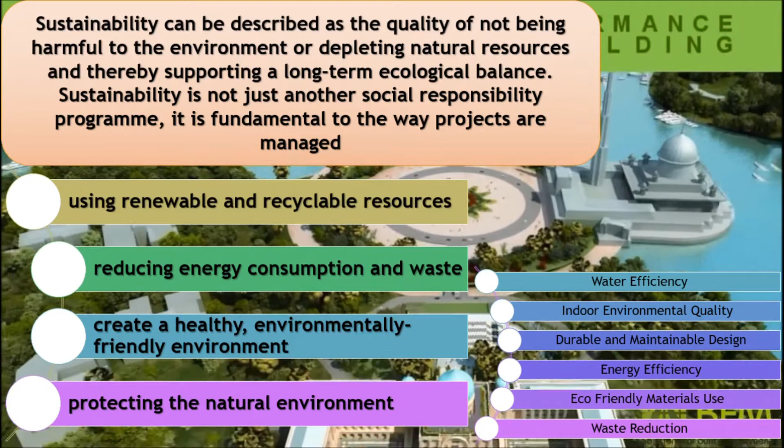Examples of sustainability include using renewable and recyclable resources, reducing energy consumption and waste, creating a healthy, environmentally friendly environment, and protecting the natural environment. The application in the construction industry is through water efficiency, indoor environmental quality, durable and maintainable design, energy efficiency, eco-friendly materials use, and waste reduction.

Ishikawa diagram. An Ishikawa diagram is a diagram that shows the causes of an event and is often used in manufacturing and product development to outline the different steps in the process, demonstrate where quality control issues might arise, and determine which resources are required at specific times. In this report, we are using an Ishikawa diagram for the project management to achieve sustainability in development.

Construction workers: lack of training in new technology, affecting motivation and productivity of workers. For the developer: increasing overall project cost, and mode of funding of the project.

For the contractor: higher cost for construction materials, lack of environment management during the construction process, poor communication during projects, lack of knowledge in sustainability, and lack of competencies in construction managers.

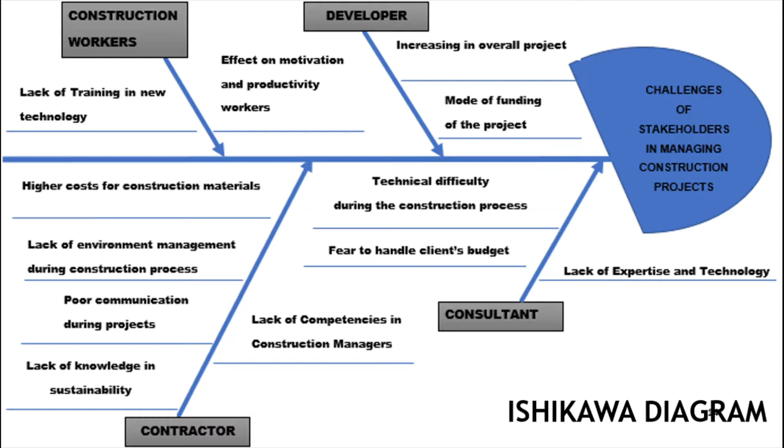For the consultant, there are technical difficulties during the construction process, fear to handle clients' budget, and lack of expertise and technology.

Impact towards developer, which are increasing overall project cost and mode of funding of the project. In a market survey, it is identified that among construction practitioners, there is a belief that sustainable construction practices will raise the cost of construction projects without a quantifying benefit, which is a perception that poses an important challenge.

Another aspect related to economics, apart from cost, is construction time, which is considered a critical performance criterion of construction projects. Construction delays will often increase the cost of the project and affect the reputation of all stakeholders, since sustainable construction requires the integration of green technologies with other building components. Therefore, dramatic delays will result if this is not considered throughout all project stages.

Mode of funding of the project, which is finance-related factors. The factors loading on this component are budget constraint, which is fear of increase in cost, and mode of funding of the project. These factors are finance-related, hence the component is named the finance-related factors.

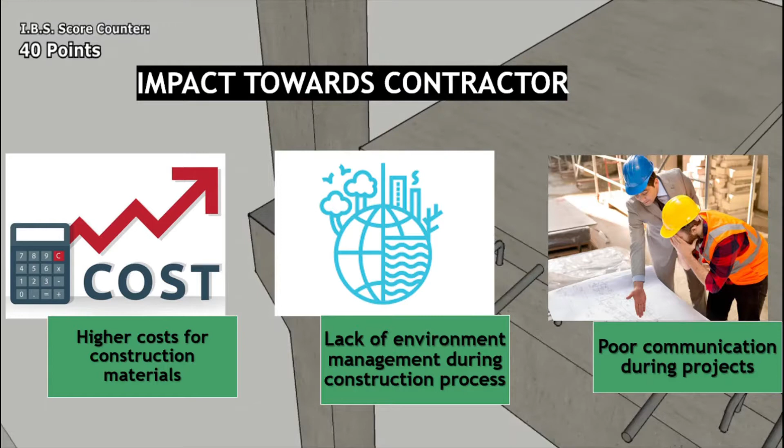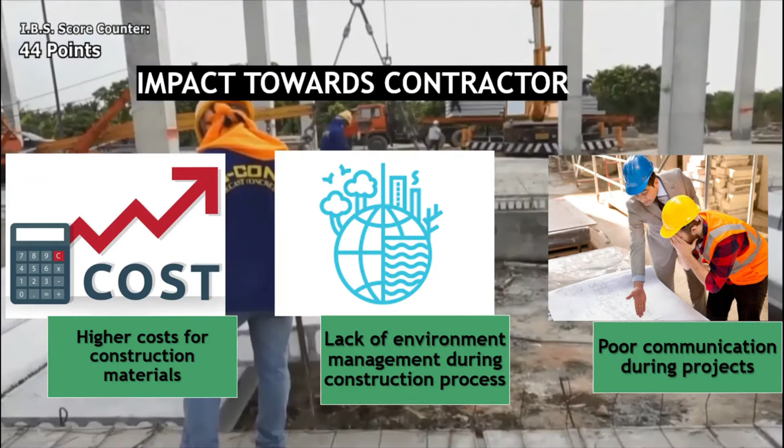The higher cost of green construction directly affects the project manager because they are responsible for managing and delivering their projects within an allocated budget.

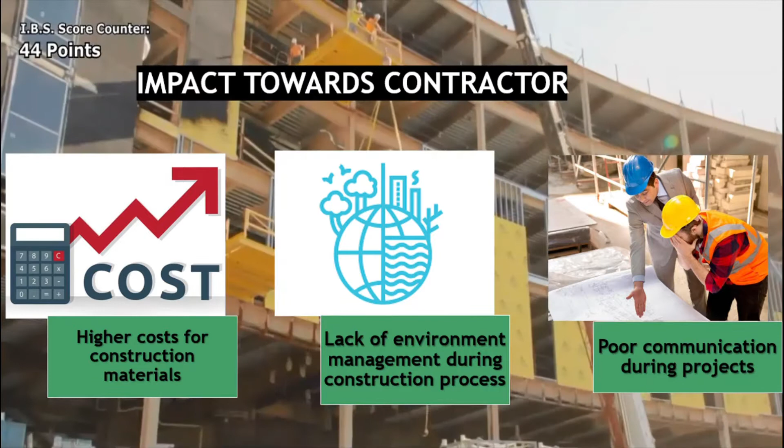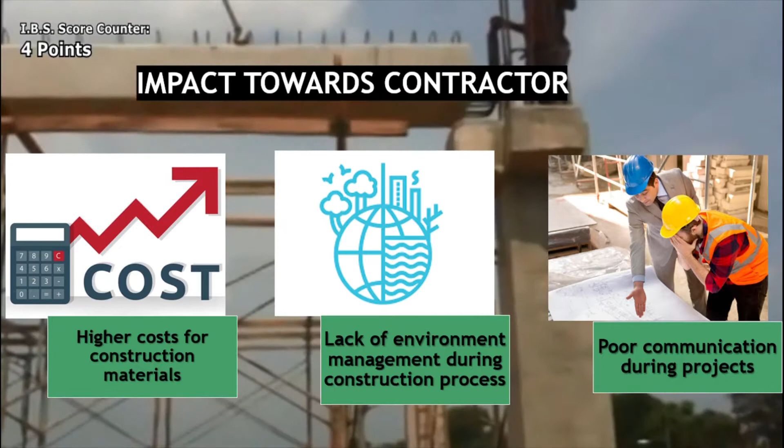The second impact is lack of environment management during the construction process. The main areas of concern were appropriate site planning and organization, assessing traffic movement, prevention or minimization of discharge, gases and airborne discharge to the atmosphere, chemical emission, noise and vibration, management of hazardous substances, waste management, and health and safety.

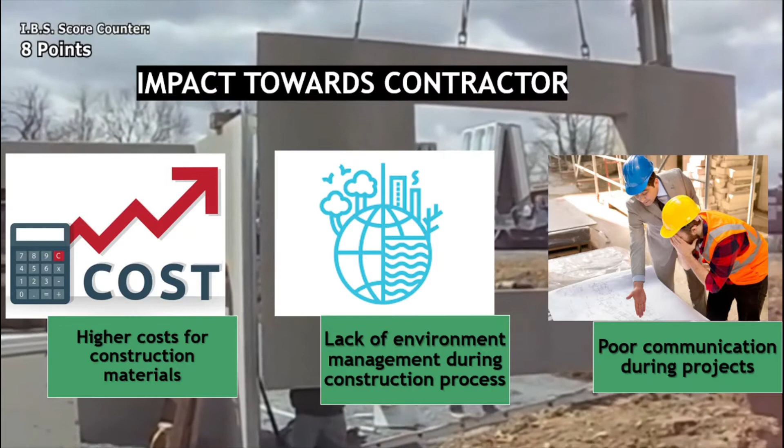The main contractor had no formal environmental management structure within its organization, but had large experience in health and safety management.

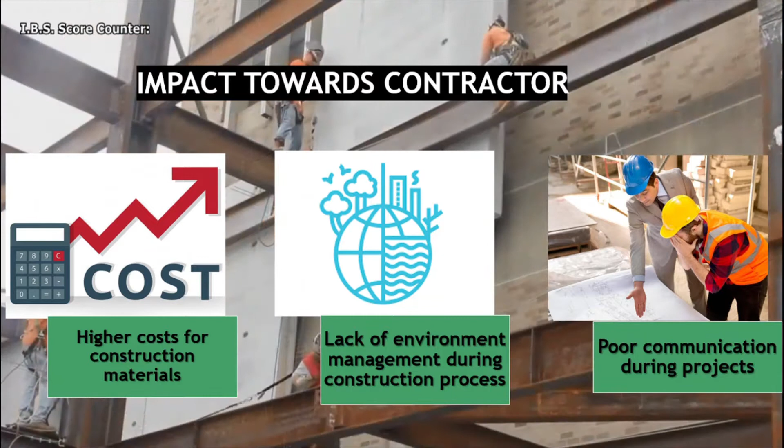The last impact is communication. Taking into consideration that a variety of stakeholders and parties involved come with similar or different requirements for the project, they participate throughout the processes, where it is clear that effective communication planning is essential in order to be sustainable.

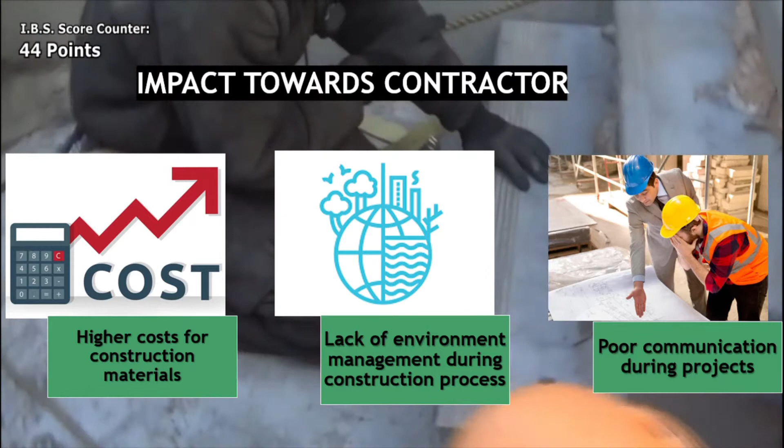The ways to promote communication can be seen through the following: first, reports are able to reach members in time; and second, to schedule times when members gather and communicate.

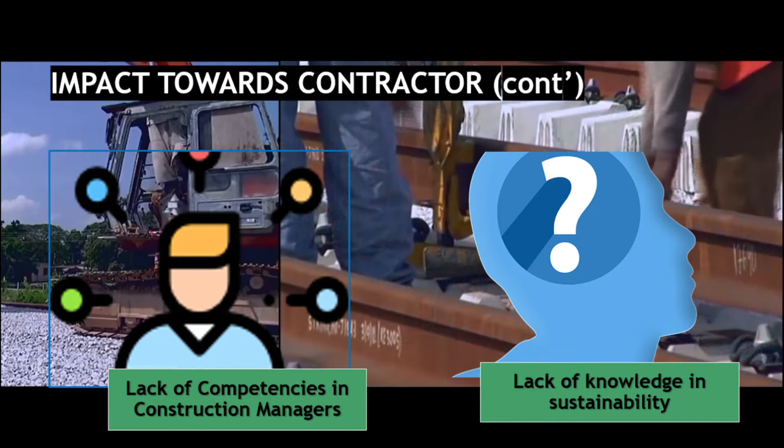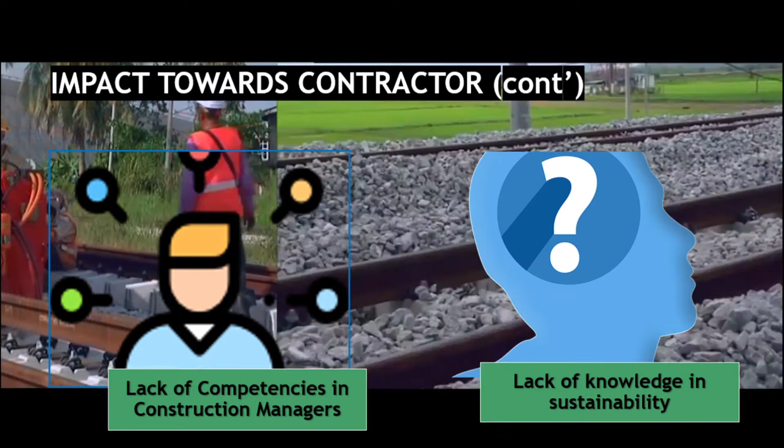Next, the impact towards contractor is lack of competencies in construction managers. Positive shifting in leadership qualities and top management's competencies has a big impact on sustainable construction success. In order to achieve the benefits of sustainable projects, it needs encouragement from highly committed leadership. The leaders are crucial to have a deep understanding of the barriers in sustainable construction. Construction firms need to finalize the leadership which is able to provide the strategy, direction and vision towards a sustainable future. Leadership has a significant role in encouraging sustainable construction.

The next impact towards contractor is lack of knowledge in sustainability. The objective of sustainable construction can be obtained if practices are informed by knowledge. This can be simplified through an example, which could help firms change their traditional construction culture: first, identify the objective and study the suitable implementation; next, create proper guidelines and brief the workers when and how to implement; next, highlight the benefits with all parties involved; and lastly, review the implementation.

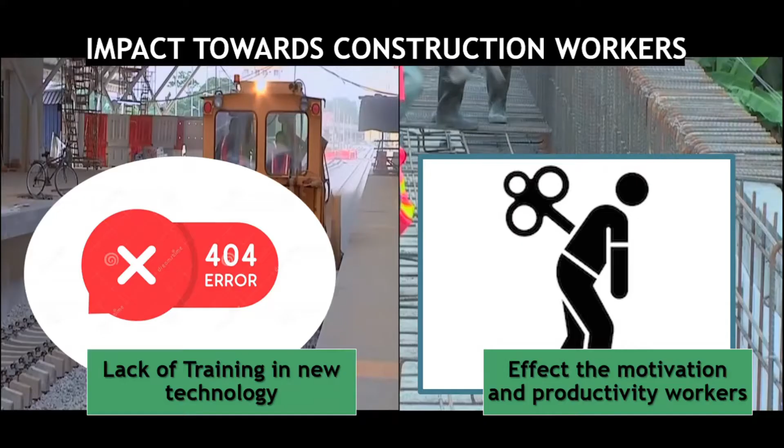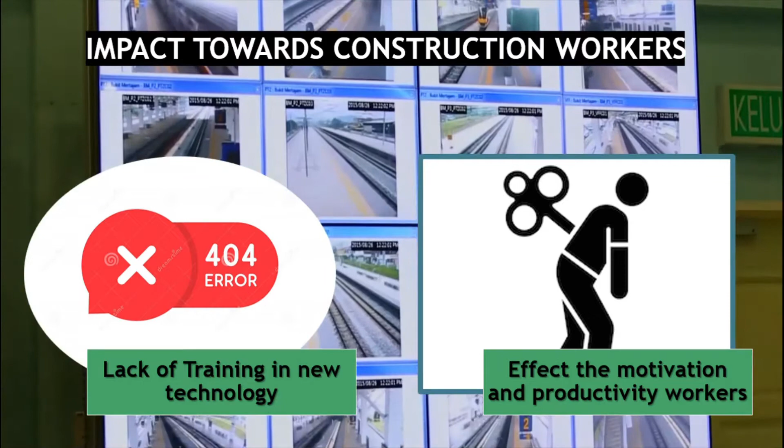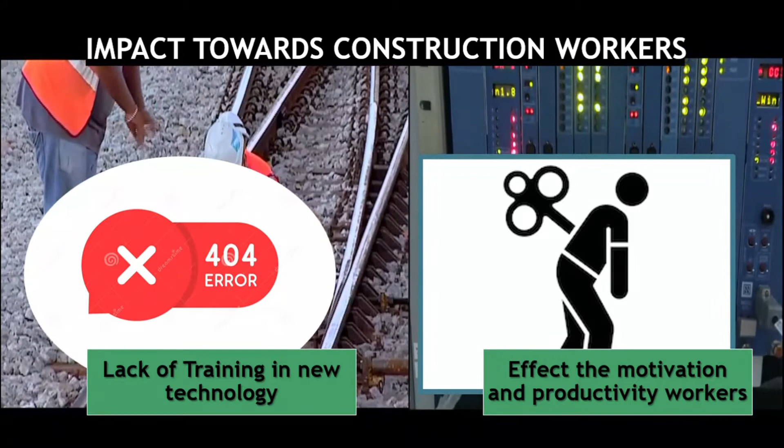As mentioned before in the Ishikawa diagram, the challenges of stakeholders in managing sustainable construction include the impact towards construction workers. The first point is lack of training in new technology. Most stakeholders in the construction industry face problems implementing this concept in their projects. Education of stakeholders about sustainable development is still at a low level. Deficiencies in training of sustainable technology make it difficult for employees interested in this new technology to attain the necessary skills. Because the sustainable and green technologies being introduced are always something innovative, it causes a lack of understanding among employees regarding the technical specifications and operation of the technologies.

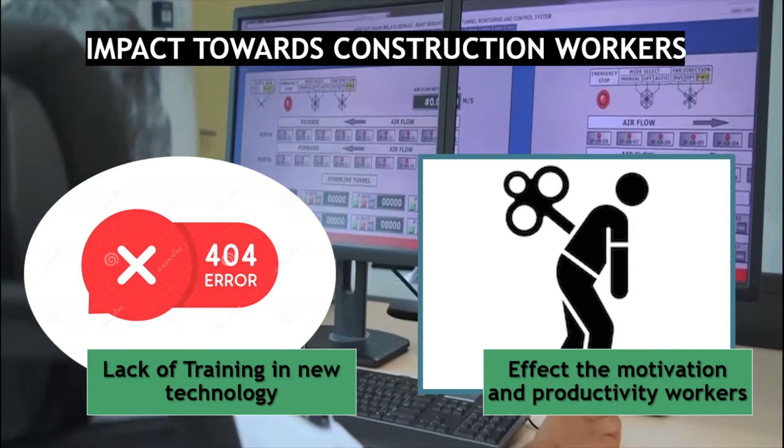The second point is affecting the motivation and productivity of workers. The motivation of workers has been suggested as one of the major factors that can reflect productivity in the construction industry. With effective and optimal usage of this human resource, all the advantages will be supplied to productivity growth within the construction project. Construction workers, specifically in developing countries, are not taken as an important element. The fact is, labor is generally the largest percentage of total project cost. Due to this high cost of labor, the laborers have a very important role in contributing to profitability in the industry.

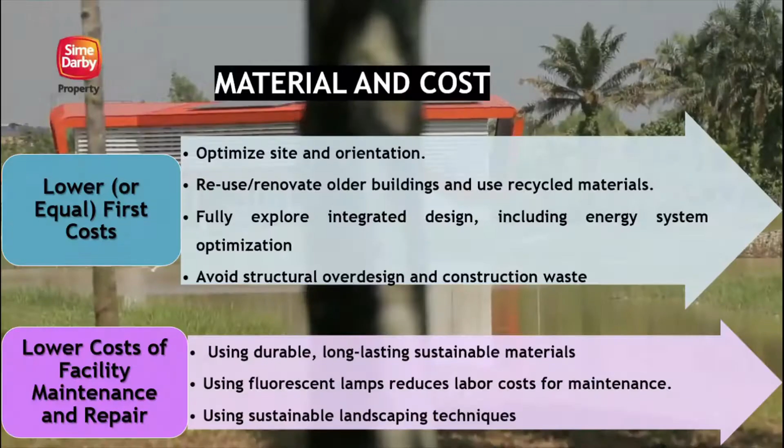The first one is innovation for future implementation to overcome the challenges of material and cost. There are two points: lower or equal first cost, and second, lower cost of facilities maintenance and repair. We will look at the first point, lower or equal first cost.

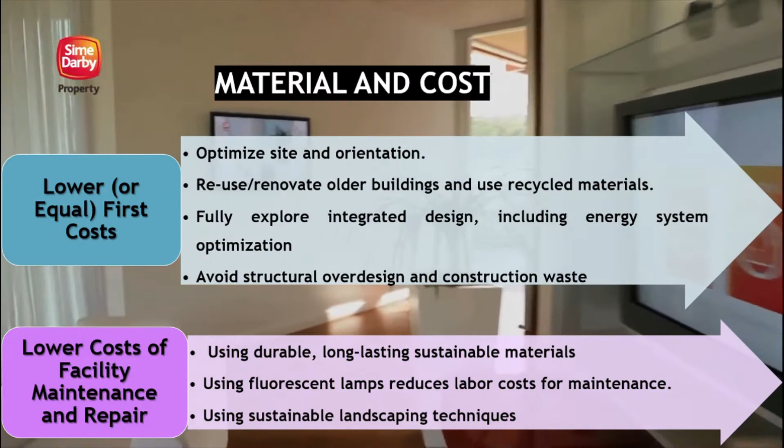In a sustainable design project, the design team conducts a trade-off exercise, trading off the cost of optional features against the cost of features that will result in energy, environmental, or social improvements. Focusing on integrated solutions and explicitly evaluating trade-offs can result in a sustainable facility built for the same or even lower cost than a more traditional building.

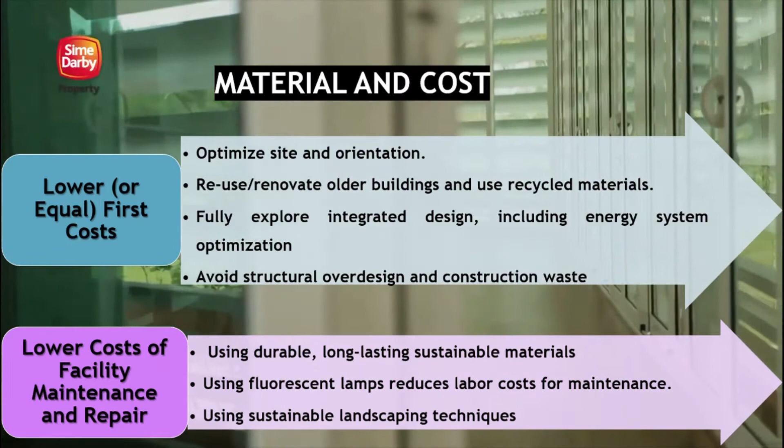The following are some design and construction strategies that a team can use to reduce first cost. First point is optimize site and orientation. One obvious strategy to reduce first cost is to apply appropriate siting and building orientation techniques to capture solar radiation for lighting and other site features to reduce cooling load.

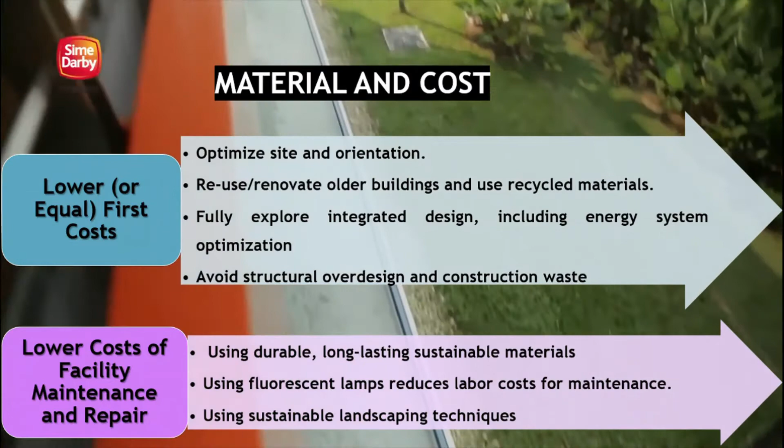The second one is reuse or renovate older buildings and use recycled material. Reusing buildings, as well as using recycled materials and furnishings, saves virgin materials and reduces the energy required to produce new materials. Reusing buildings may also reduce time and therefore money associated with site planning and permitting.

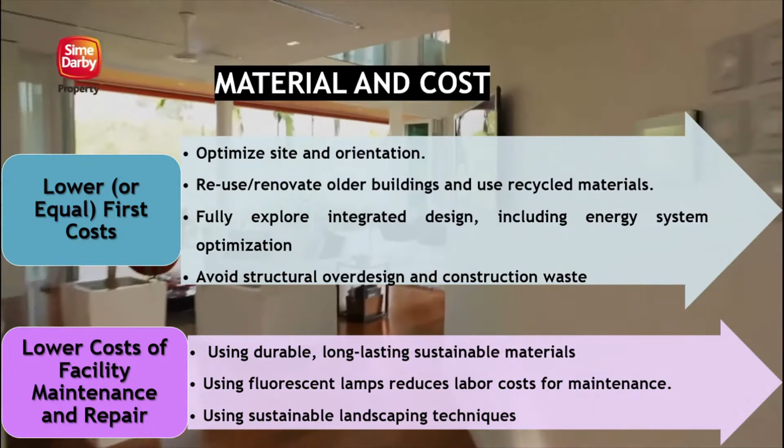Avoid structural over-design and construction waste. Optimal value engineering and advanced framing techniques reduce material use without adversely affecting structural performance.

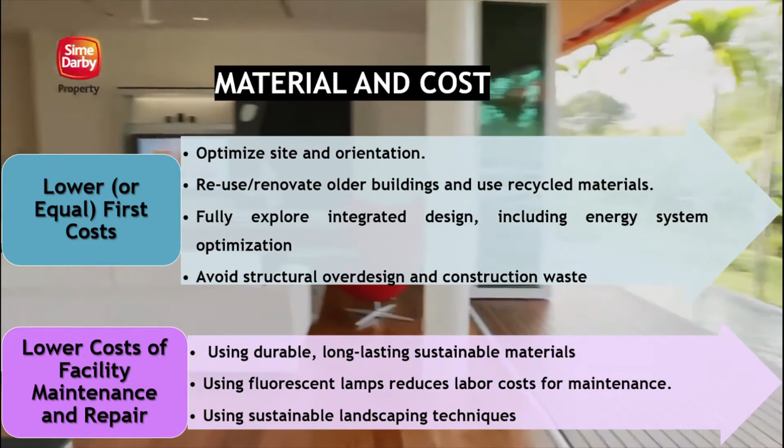Design to minimize construction debris, for example, using standard size or modular materials to avoid cutting pieces and generating less construction waste. Also minimize labor cost for cutting materials and disposing of waste.

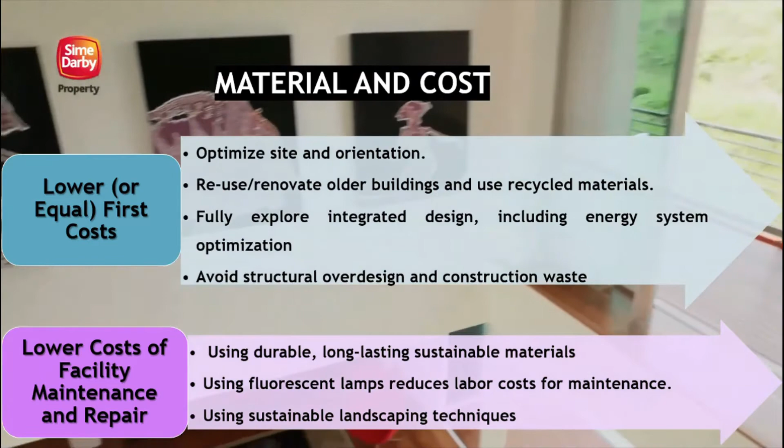The last point is fully exploring integrated design, including energy system optimization. As discussed before, integrated design often allows heavy equipment to be downsized.

Using daylighting and operable windows for natural ventilation can reduce the need for artificial lighting and mechanical cooling, lowering first cost. Beyond energy-related systems, integrated design can also reduce construction costs and shorten the schedule.

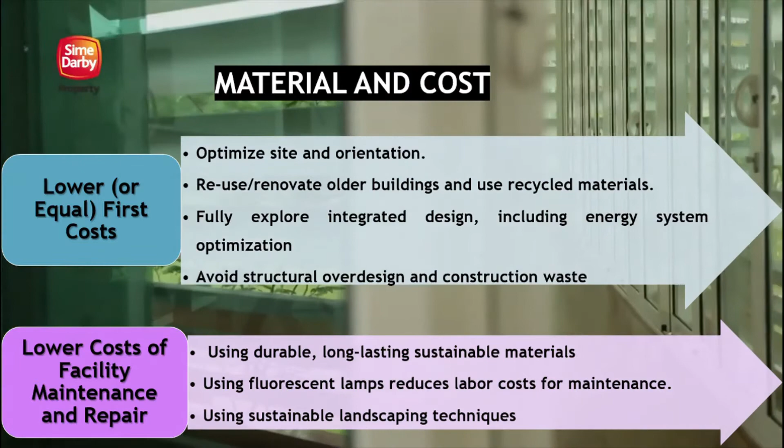For example, by involving the general contractor early in planning, the design team may identify multiple ways to streamline the construction process. The second point for material and cost is lower cost of facilities maintenance and repair.

Sustainable design aims to increase durability and ease of maintenance. For example, service areas within sustainable buildings should be designed with enough space to allow easy access to mechanical equipment, which reduces the cost of scheduled maintenance, repair, and eventual replacement.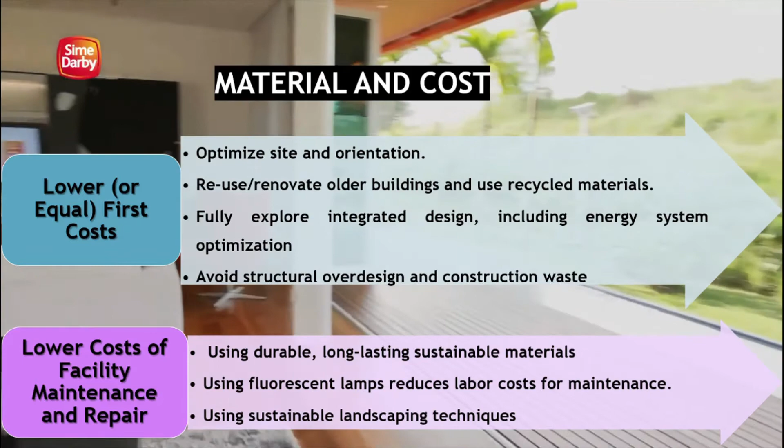Other approaches can also reduce annual maintenance costs using sustainable design. First, using durable, long-lasting sustainable materials can decrease maintenance and repair costs. For instance, cement companies have tested fly ash and slag concretes and found that, if properly cured, they have greater strength and durability than concrete made from Portland cement.

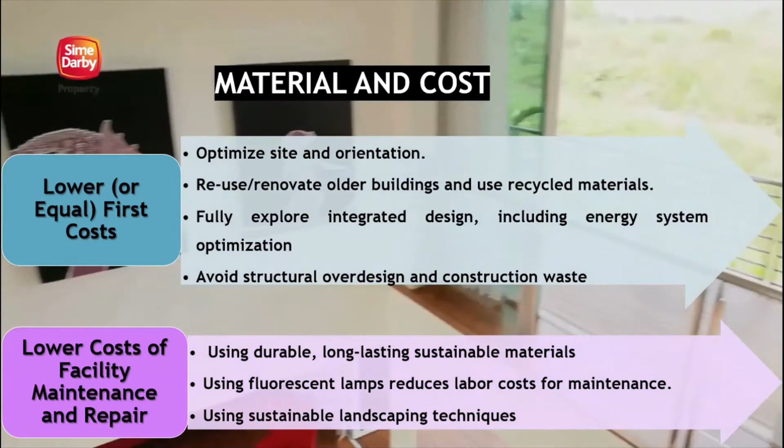Second, using fluorescent lamps reduces labor costs for maintenance. This lamp lasts about 10,000 hours as opposed to 1,000 hours for an incandescent lamp. Therefore, about 10 lamp changes and the associated labor costs are avoided by using fluorescent lamps.

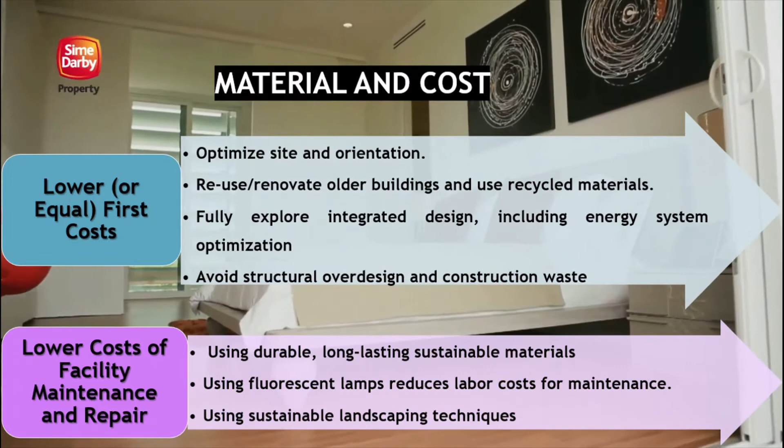Lastly, using sustainable landscaping techniques typically decreases lawn mowing, fertilizer use, and irrigation, and has a short payback period.

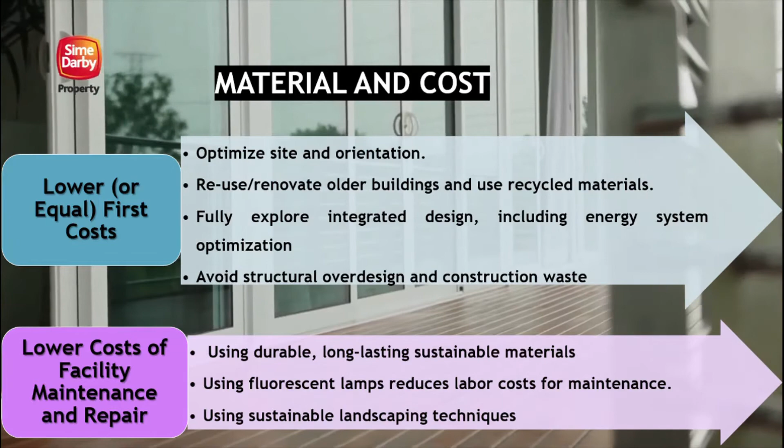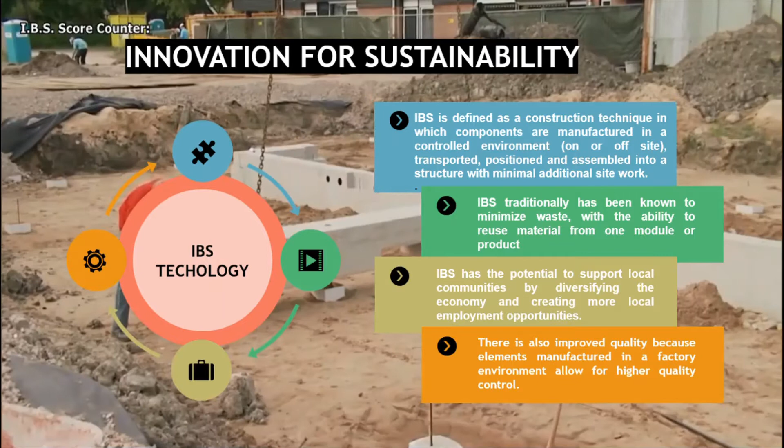An innovation that can be implemented in sustainability is IBS, Industrialised Building System. IBS is defined as a construction technique in which components are manufactured in a controlled environment, transported, positioned, and assembled into a structure with minimal additional site work.

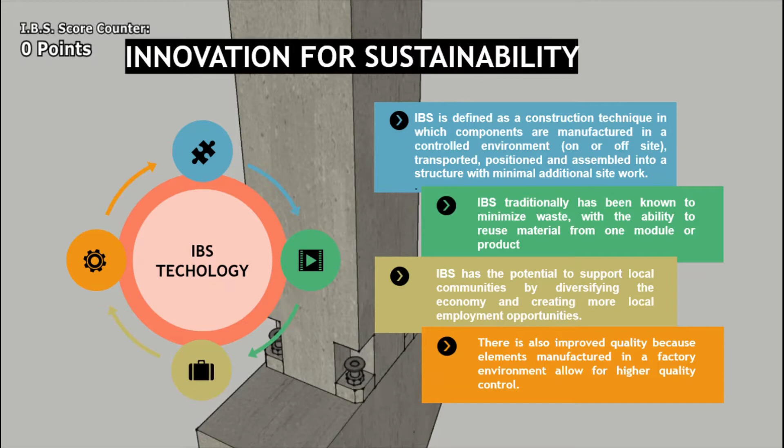IBS traditionally has been known to minimize waste with the ability to reuse material from one module or product. IBS has the potential to support local communities by diversifying the economy and creating more local employment and opportunities.

The next point will be the working environment, which focuses on motivation. This is Maslow's theory. According to this theory, in order to motivate a person, there is a need to understand what level of condition the person has in the hierarchy of needs, and to focus attention on satisfying the needs at that level or the level above it.

Motivation can be defined as providing the right conditions for people to work effectively. The project manager should show enthusiasm and commitment towards sustainability as well as creating an environment. Motivation towards sustainability is not a product of emotion but a product of sound planning and management.

By improving the quality of site management and material management, on-time payment, systematic flow of work, supervision, work discipline, occupational education and training, with good pay and working conditions, motivation will improve, and simultaneously the productivity of the project will improve.

The next point for innovation is communication skills. The main skills that need to be improved by all stakeholders within the construction industry are questioning, reflecting, explaining, negotiation, presentation, writing, meetings, and listening.

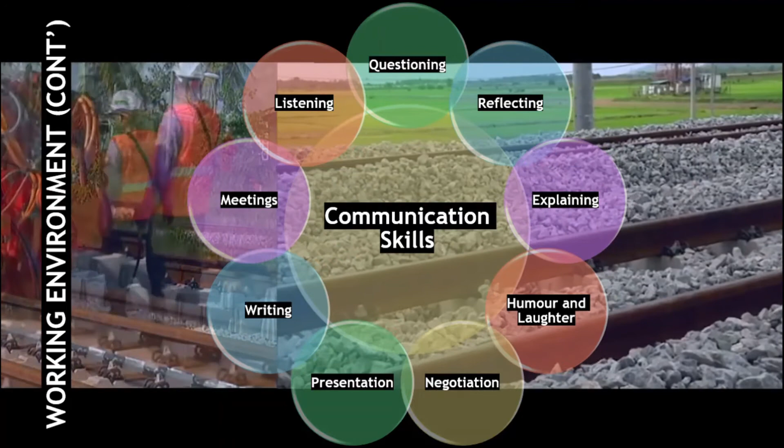Lastly, this listening. The heart of communication is not words, but understanding - not only to be understood, but also to understand, which implies understanding sustainability. Active listening increases understanding; this skill is important. A project manager therefore needs the skill of listening to be able to accomplish a sustainable project.

The next one will be leadership. Construction managers play the main role of influencing and transforming the subordinates. These actions could improve the sustainability performance. Leaders with an inspirational leadership style have their way to manage projects, and subordinates could transform projects towards sustainability and higher productivity. Employers should encourage each employee to share new ideas and provide support by setting up meetings, suggestion boxes, dedicated rooms, and offering trainings.

Next is recommendation. PDCA, or Plan, Do, Check, Act cycle, is a useful tool that can help teams solve problems much more efficiently. PDCA has some significant advantages: it stimulates continuous improvement of people and processes, and it lets your team test possible solutions on a small scale in a controlled environment. For this case, we like to recommend using PDCA to overcome the challenges of stakeholders in managing sustainable construction.

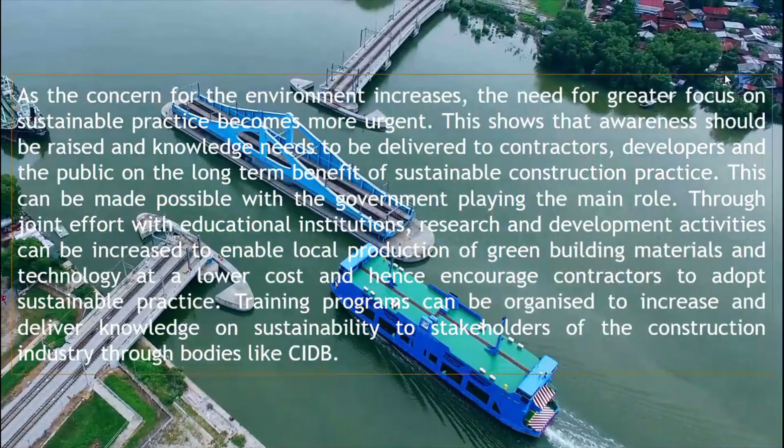As concern for the environment increases, the need for greater focus on sustainable practice becomes more urgent. This shows awareness should be raised and knowledge needs to be delivered to contractors, developers, and the public on the long-term benefits of sustainable construction practice. This can be made possible with the government playing the main role. Through joint effort with educational institutions, research and development activities can be increased to enable local production of green building materials and technology at a lower cost, encouraging contractors to adopt sustainable practice. Training programs can be organized to increase and deliver knowledge on sustainability to stakeholders in the construction industry through bodies like the CIDB.